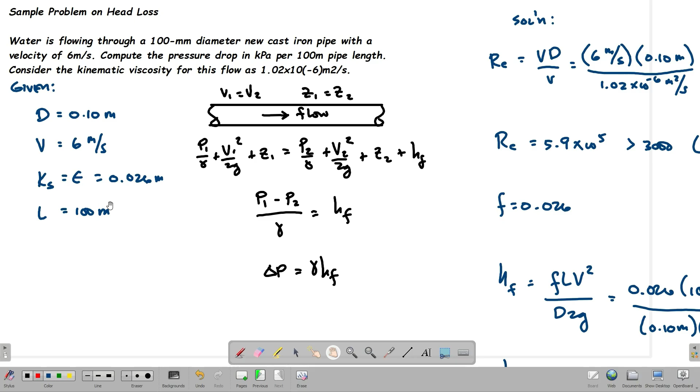So we've written here the given values, like diameter, velocity, and then the KS here, or for other references, the symbol they use for KS or our relative roughness is epsilon or E, which if we look at the tables for the sand-grain roughness, we have values in millimeters and inches.

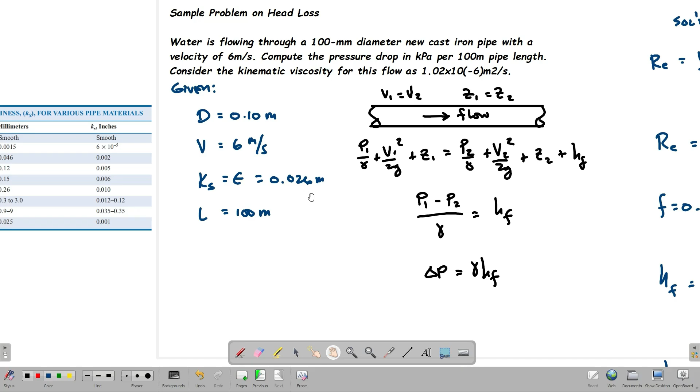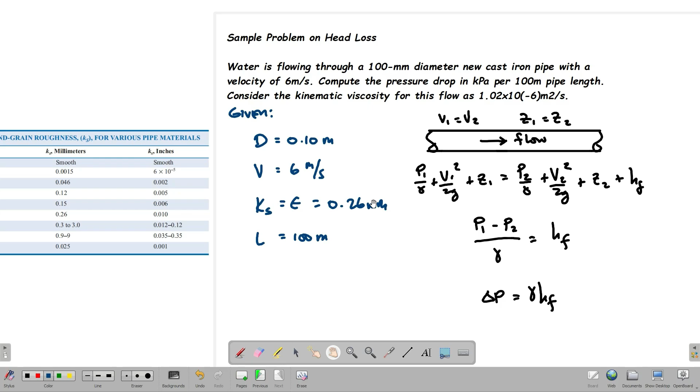And since what's being asked is per 100 meter pipe length, our L is 100 meters, okay? So before we solve for the head loss, we'll first make the energy equation for our flow.

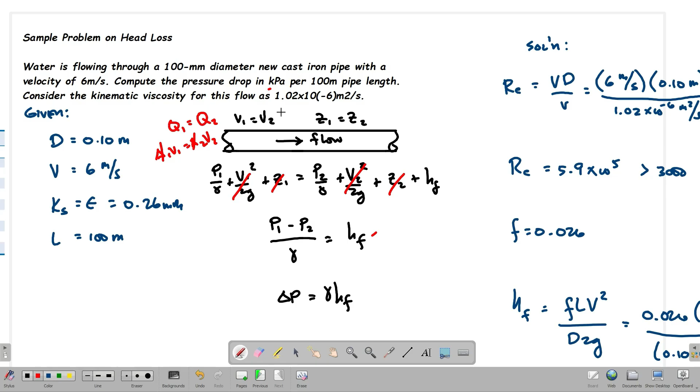Since what's being asked is in kilopascals, we'll move the unit weight to the other side so the unit becomes kilopascals. So the pressure difference or pressure drop is just a function of the head loss. We just need to get the head loss then multiply it by the unit weight of water to get delta P in terms of kilopascals, okay?

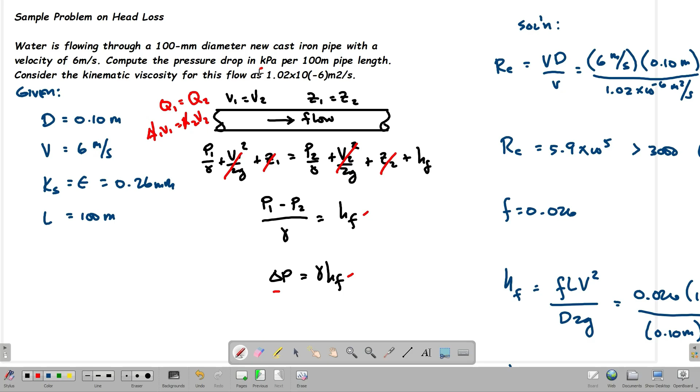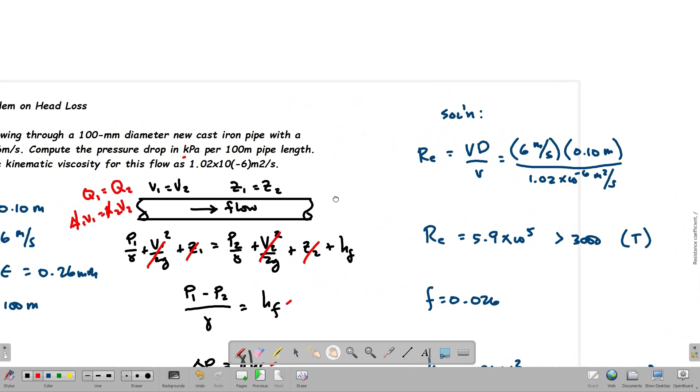So to get the head loss, we first evaluate the type of flow, whether it's laminar or turbulent. We'll use VD over V. Since V (kinematic viscosity) is given as 1.02 times 10 to the negative 6 meter squared per second, this is our equation, VD over V.

So let's substitute the values. We have 6 for velocity, 0.1 meter for diameter, and the kinematic viscosity. Let's go to our calculator. That's 6 times 0.1 divided by 1.02 exponent negative 6. So that's 588,000, or equivalent to 5.9 times 10 to the 5.

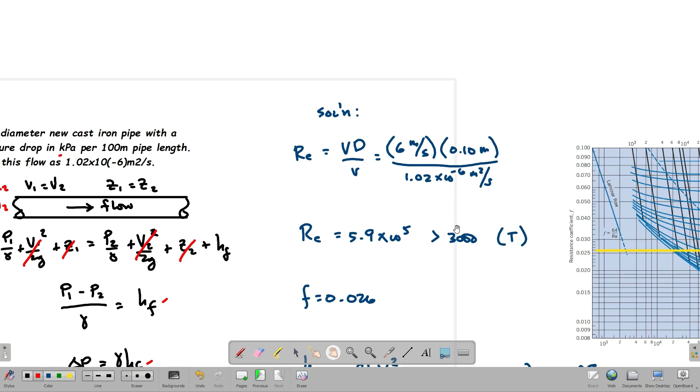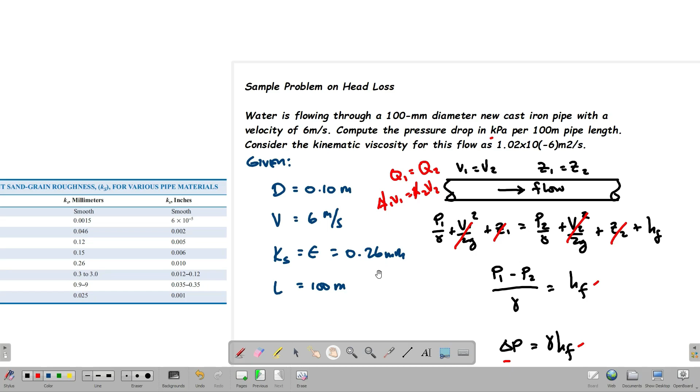Since binigyan tayo ng sand grain roughness na KS or epsilon na 0.26 mm, ito magagamit natin kapag ang method na gagamitin natin is yung Moody diagram. So Moody diagram, di pala natin nasulat dito. So this is the Moody diagram.

So sa Moody diagram, either lang dito sa tatlo yung makuha natin. So at least meron tayong dalawang values makukuha natin sa friction factor. So in this case, meron tayong KS, ito yung gagamitin natin na column. And then meron tayong Reynolds number, ito na yung gagamitin natin.

So, KS over D, that's the relative roughness. Meron tayong KS na 0.26. Tapos, the diameter is given as 100. So, i-divide lang natin, hindi na natin ikakalkule to.

So, that's 0.0026. Magkakancel yung mga unit natin dyan. Hanapin lang natin siya dito sa mga values dito sa column na to. So, this is 0.002, this is 0.004, somewhere dito sa gitna is 0.003. So, therefore, medyo below lang sa gitna yung 0.0026.

Tapos, gawa tayo ng line. Yung mga blue na lines dito, ito yung nagre-represent ng relative roughness natin. Pero, straight lang siya dito, sa part na to, medyo straight lang yung lines natin. So, straight lang din natin yung red line na yan, yun yung relative roughness natin.

Tapos, dito sa baba, meron tayong Reynolds number. Meron tayong values dito for 10 to the 5. Since yung Reynolds number natin is times 10 to the 5, hanapin lang natin yung 5. So, this is 4, tapos 6, ito yung gitna, it's 5 times 10 to the 5. Pero yung value natin is medyo malapit na siya sa 6, that's 5.9. Kaya ito yung minarkahan natin, yung line na green na yan. So, that's closer lang sa 6.

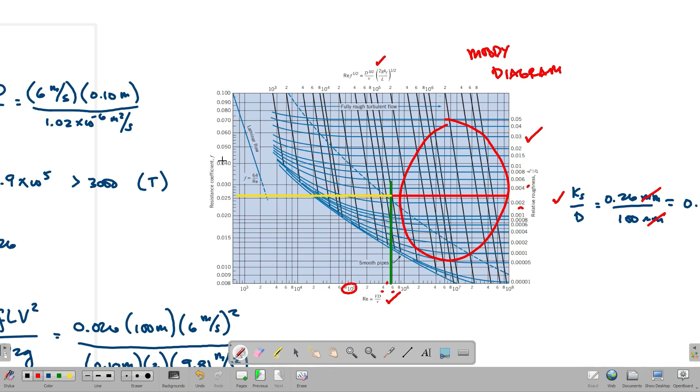So, this is 0.025, yung point na yan. So, yung next na line niya is 0.026. Kasi ito, ito lang yung titingnan natin na bracket. 0.026, tapos each line yan, magiging 0.027, 28, 29. So, yung yellow na line, dito siya swak sa 0.026 na value. So, yung F natin is 0.026 yung gagamitin natin based dito sa Moody diagram.

Tapos, yun, na yung F, meron L, may V na given, so may diameter din. So, makukuha natin yung head loss natin, which is equivalent to 47.7. Double check lang natin ito sa calculator natin. That's 0.026 times 100 times 6 squared divided by 0.1 times 2 times 9.81. That's 47.71 dapat to. Kasi pag round off, that's 0.71. Tapos, per 100 meter length yan.

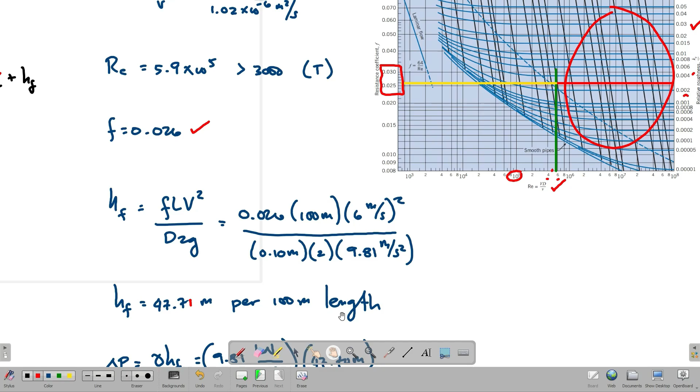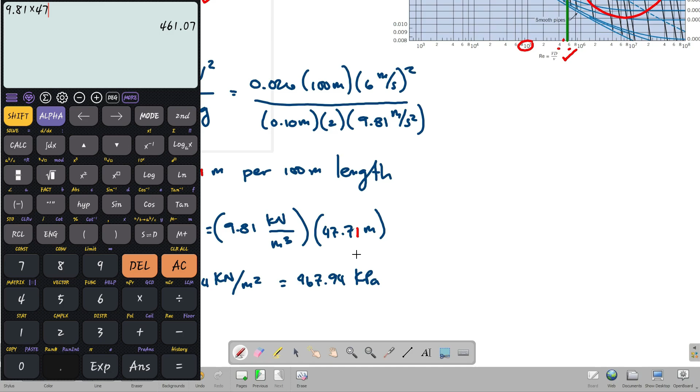Siyempre, tapos using the equation kanina, multiply lang natin siya sa unit weight, tapos makukuha na natin yung in terms of kilopascal. So, yung unit weight natin, that's 9.81 kilonewton per cubic meter. Tapos, multiply natin sa nakuha natin kanina na value for head loss. That's 9.81 times 47.71. That's 468. Double check lang natin, that's 468.03 kilonewton per square meter, or that's kilopascals. So, 468.03

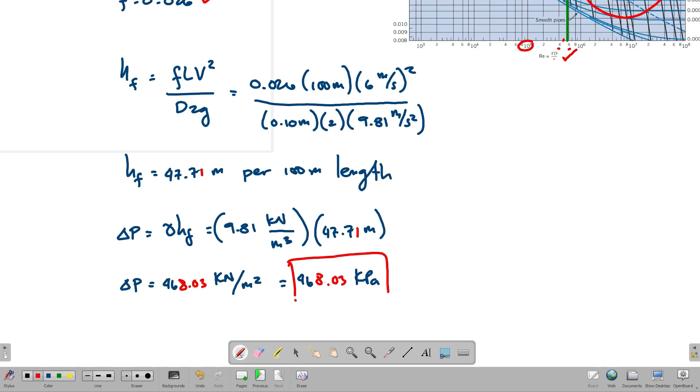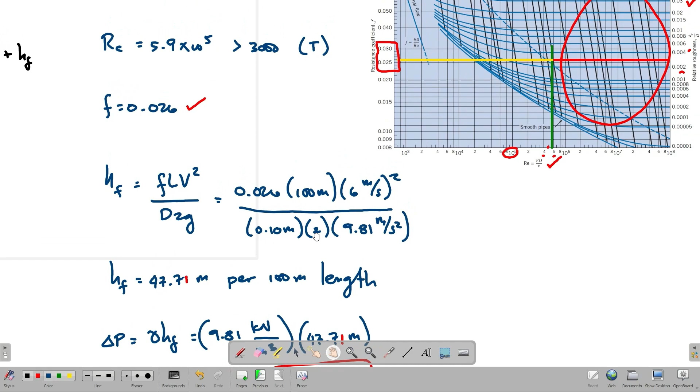Kilopascals. Okay? So, I think ito na yun, ito na yung final answer natin. Buti na double check natin sa calculator para makita natin na kung may mga discrepancy. Lalo na dun, kahit sobrang ganito lang kaliit na discrepancy, pwede na rin siya magiging source ng error later sa mga design na part. Okay? So, I think yun na yun para sa sample problem na to.